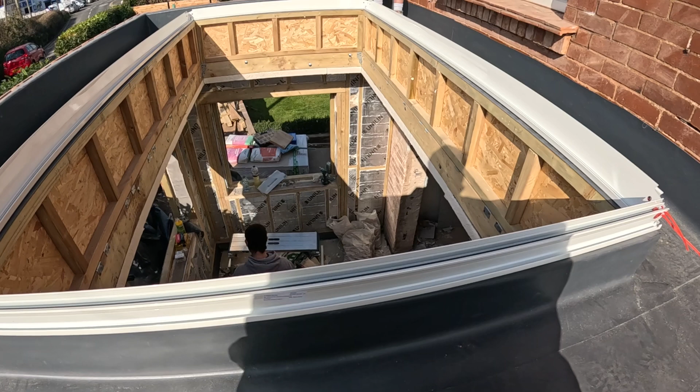So first of all, unpackage everything. That probably takes the longest. From then, believe it or not, we set out our base plate and we cable tie the two ends together. Really simple. Two holes, put it all together. There are some little angular brackets in here which hold it nice and square. So we've done all four corners.

Now the process is to take the frame off, stand it up, silicone underneath it as a secondary layer of protection all the way around it, and then now it's time for us to take it and flip it over and plonk it on the hole.

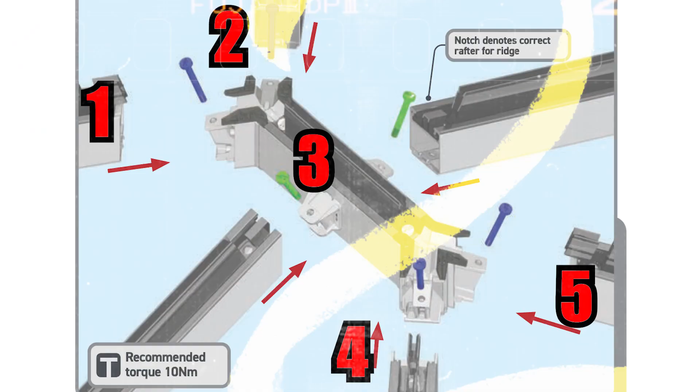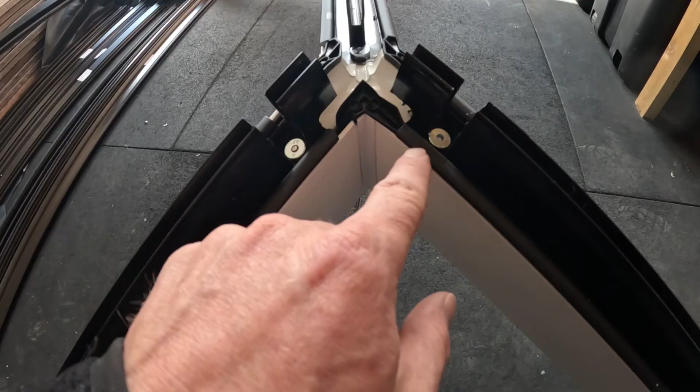So in order for us to make it a little bit easier, we've assembled this frame down here. Now it comes in 5 pieces, so you can see that it's got a 70mm screw that goes down through into there. It's really as simple as lining them up, bit of fiddling around, and then they tighten up and that pulls in these gaps. So this bit here is separate, that's here separate, same at the other end, and now we have this ready to go on. So we have brought the frame and really quite simply just plonked it on.

One of the amazing things about this is it's really quite simple. You take this little bolt here, you can see that there is a red plug lined up there, and it's simply a case of threading them in, lining them up, and they actually screw into, you can see there, the threaded hole on the frame that slots down into it. Bit of a tap in that hole, tighten it up.

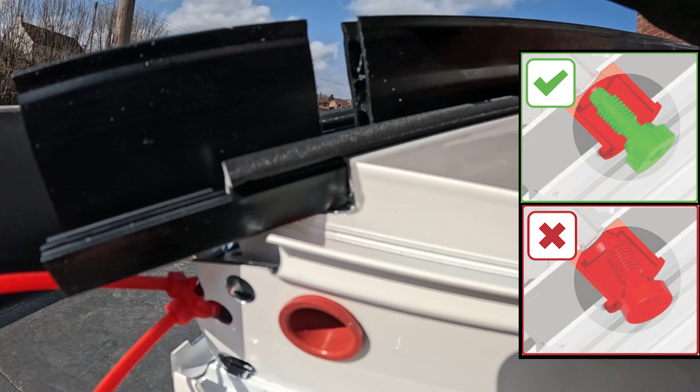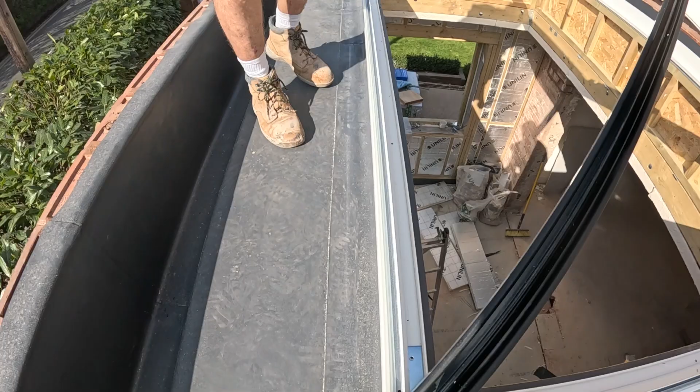Now what Mark's doing is just running around and making sure that we have the lantern square with the hole, and once that is the case, then we can go around and start using our fixing points here, and that will get us fixed into the frame, and then we are good to go.

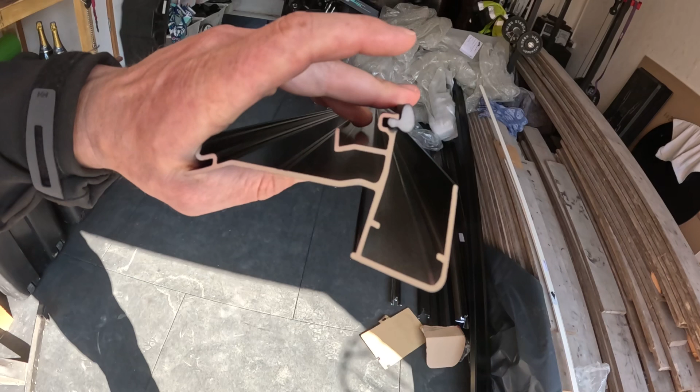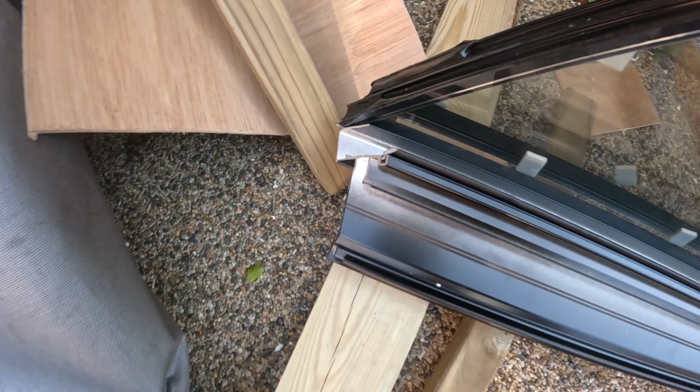So what we're going to do now is we'll put the glazing bars on the bottom of them. The glass slots into that gap there, and then it sits like that. This holds the glass from slipping down and out. One thing to note is that the edges of these are only just short of the glass. So make sure that when you are putting the glass into the bars that you've got it even on both sides, and the sticker, you can see here, for optimum performance, glaze this in the interior. So the sticker on the inside, that's the way it goes.

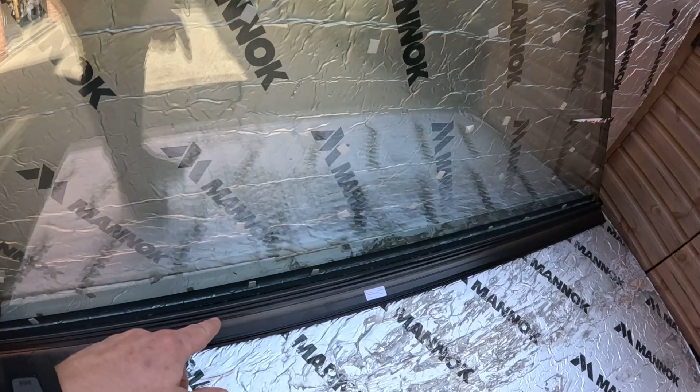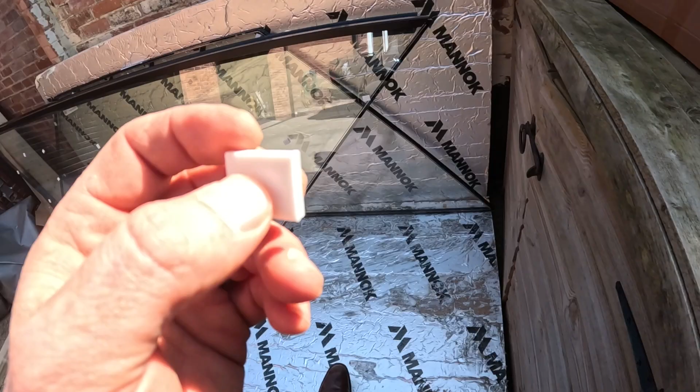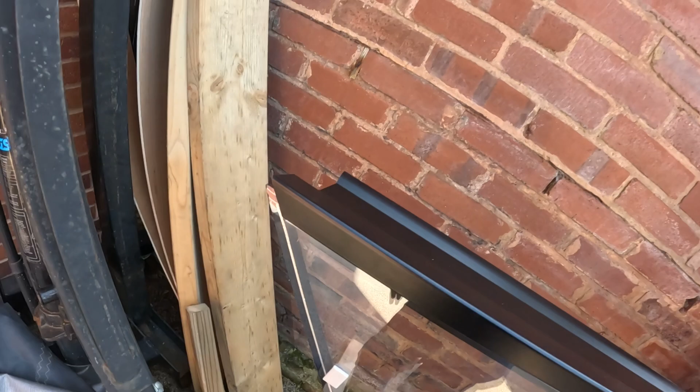So this is what it should look like. We just had to flip the piece of glass over so that it was facing the right way still. Make sure you take all these little bits off because they're going to cause you problems. And you can see here we've got a gap down here for the end cap to sit, and you can see here we've got a very similar gap down here for the end cap to sit, and that is exactly how it needs to go. And then we feed it up through the hole and plonk it in place.

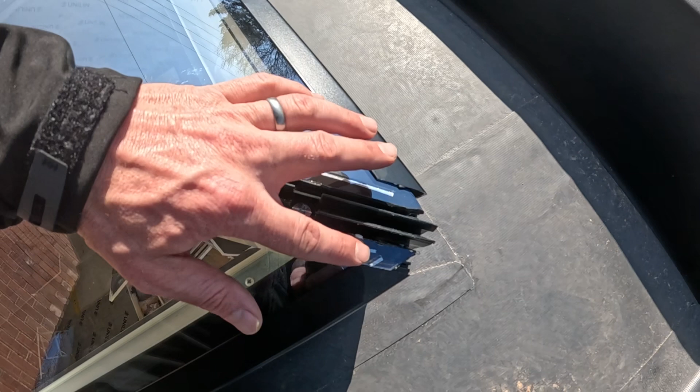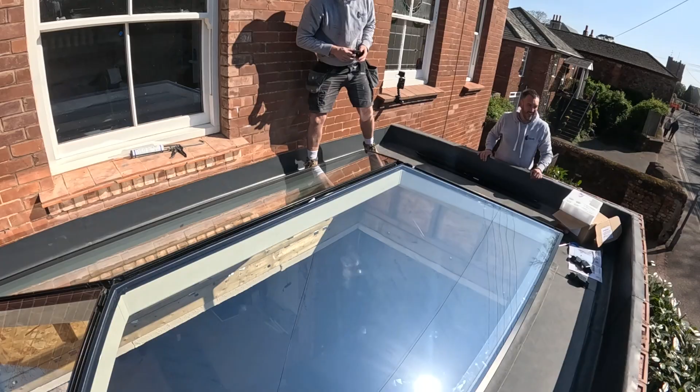So the glass is in. Bit of a mission getting it up here, but it's up here. As you can see, it looks absolutely stunning. This is probably the most awkward part of the job, is when you put these trims on to hold the glass, you have to get them perfect so that you can put the end cap on. You can see all of the engineering is so tight on the tolerances, and Mark's really enjoying it, aren't you, Mark? Yeah. So you can see here, these are the end caps, and they essentially slot over.

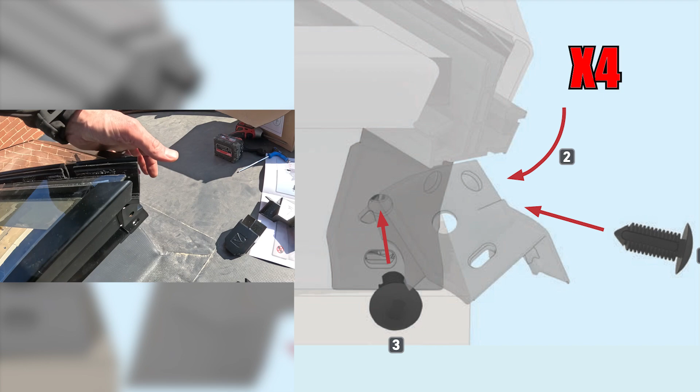These are the top ones, and the bottom one pop in, and then there's plastic rivets that go inside there. So we've got our little plastic grommets. So you can see here they go in the top big hole here. The old hand mallet. It's brilliant. So that took all of about 2 seconds to put all the base caps in.

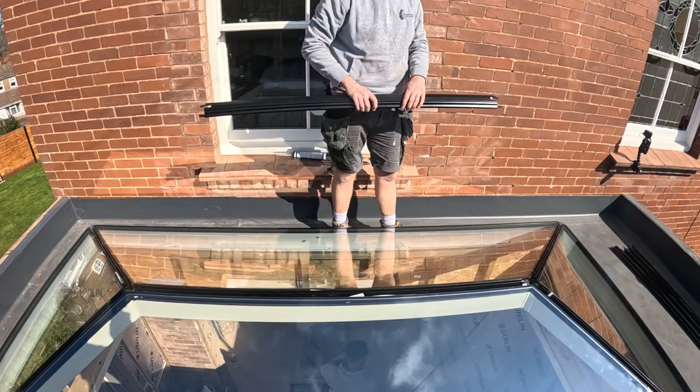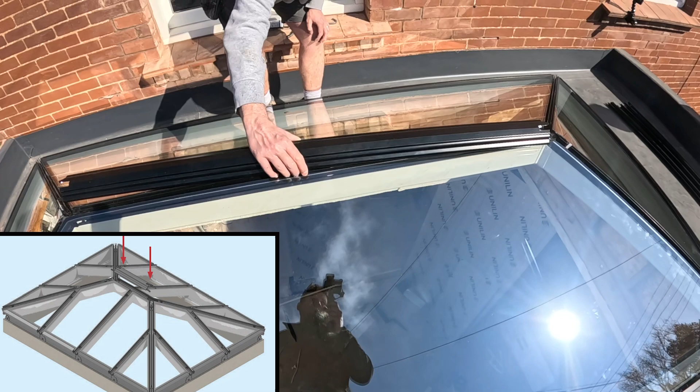So now what we're going to do is start getting these glazing bars on. One thing to note, take all of the stickers off before we put the glass in, because now we've got that one sticker and it's quite a long way off the ground. Line them up so it's nice and even.

How it is. Oh, that sounded good, Mark.

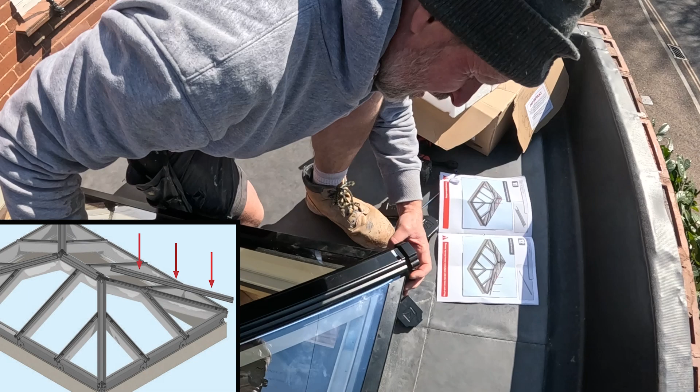So we just put it in unevenly. We had a big gap at this end and a little gap at this end, but as you can see, with a gentle tap with the rubber mallet, it will slide along in the groove. No, that's it. Yeah. Just got to put them down. Yeah, I'm just positioning it right. Lovely.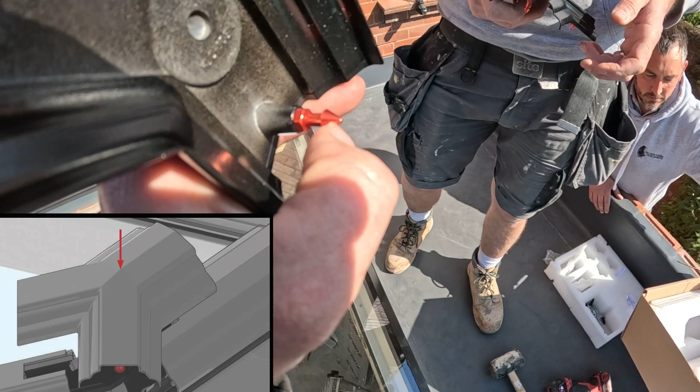Yee-hee! So you can see here, you've got these really cool anodized aluminium parts that slot. Oh gosh, that's satisfying.

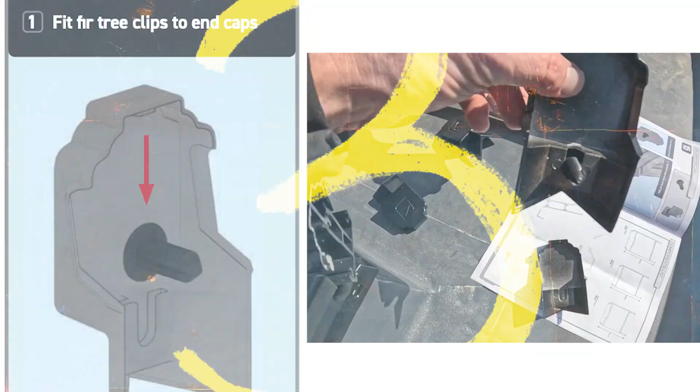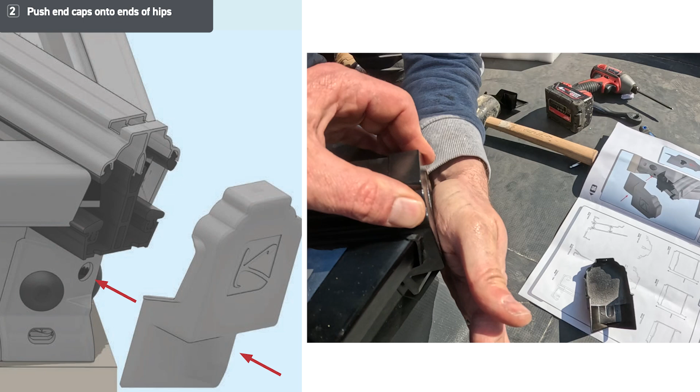One, two, three, four. These you need the little grommets to slide in there. So you can see here they've just got a little plastic grommet that slides into it, and then as Mark's going to show you now, they clip over onto the top into this groove in the aluminium. Gentle little love tap. That times 4 corners.

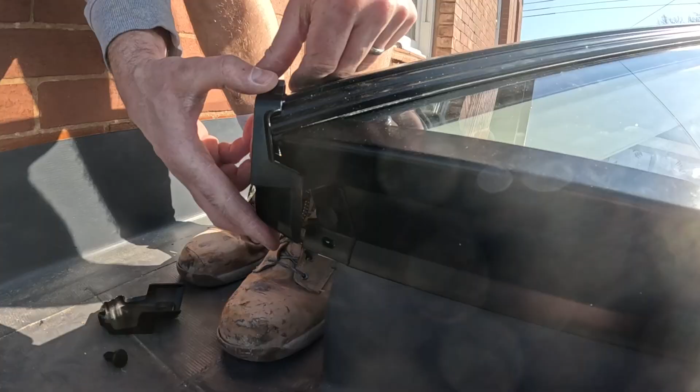Don't they look great?